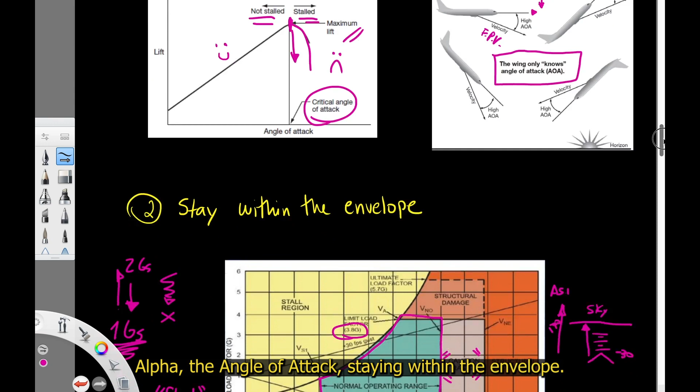So we've talked about the importance of alpha, understanding alpha, the angle of attack, stay within the envelope. The next thing we're going to talk about is you gotta stay in control.

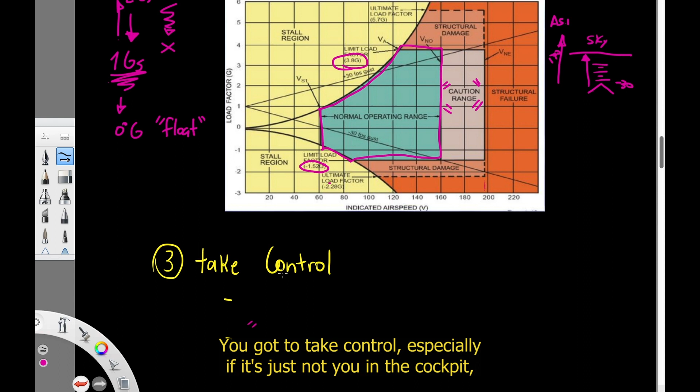You gotta take control, especially if it's not just you in the cockpit. If you're the captain, or even if you're the first officer, in a multi-crew environment, the airplane needs someone to take control, and only one person can take control.

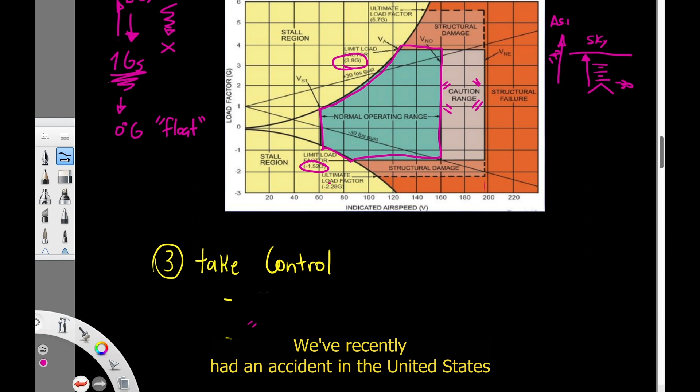We've recently had an accident in the United States where two different control inputs were applied. It sheared the control column and caused an airplane to crash. It's very, very important to understand who has taken the flight controls. That's why the positive exchange of flight controls is very important, and only one person flies the airplane at all times.

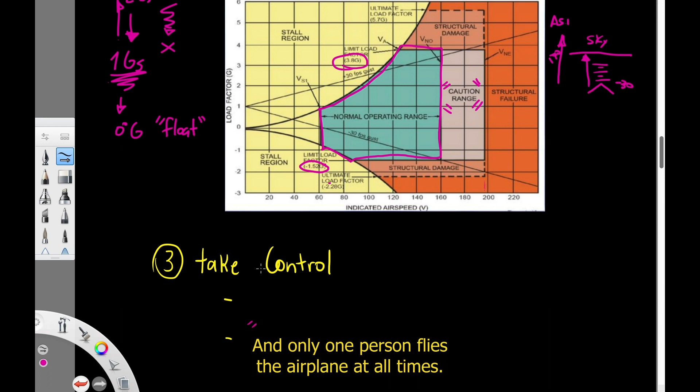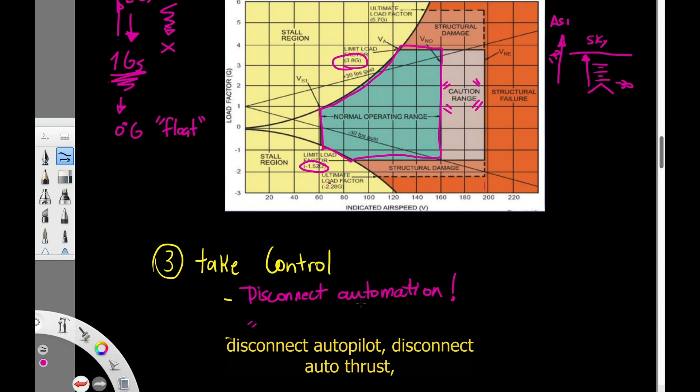So, take control. If you're flying more advanced airplanes with autopilot and auto thrust, disconnect automation. This is obviously if you are in an unusual attitude environment. Disconnect automation, exclamation point, period, done. Disconnect autopilot, disconnect auto thrust, and the next thing that should come out of your mouth is 'I have control.'

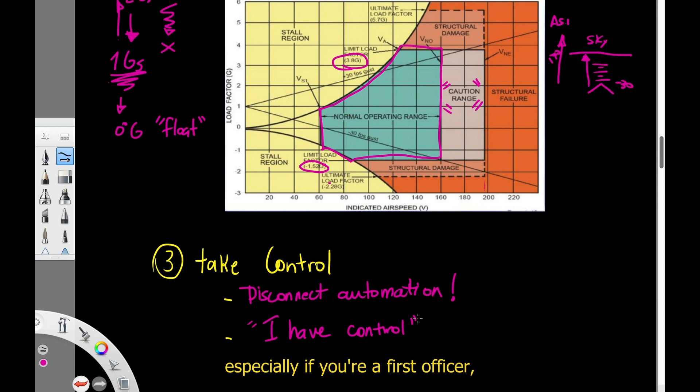But you might say, well, hold on, I was flying the airplane to begin with. Why do I always have to say I have control? Well, if you're in a multi-crew environment, especially as first officer, if you don't say 'I have flight controls' or 'I have control,' it's very likely the captain will take control immediately because that's his airplane.

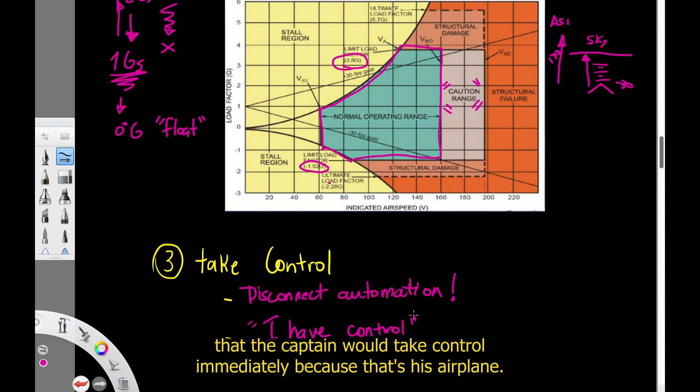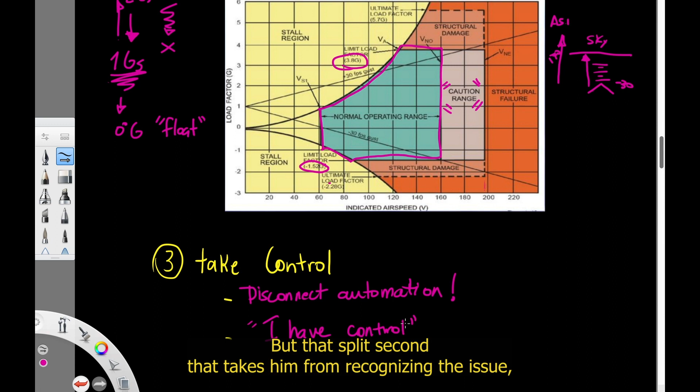It's a very common thing, they want to deal with it and take care of it. But that split second it takes him to recognize the issue, thinking 'why hasn't my first officer taken control? Oh, I have to take the flight controls' - that split second may well bring an airplane from an okay attitude that you can recover, to an unrecoverable unusual attitude.

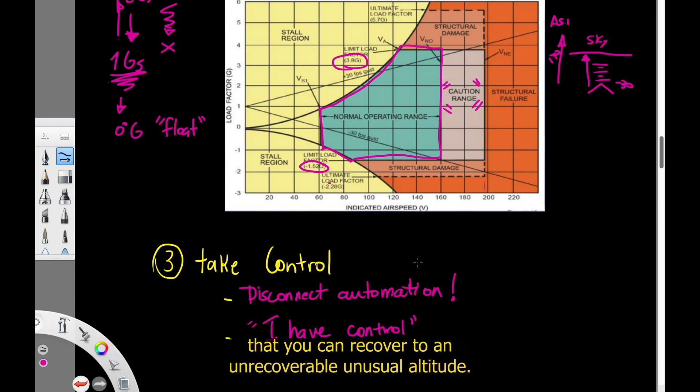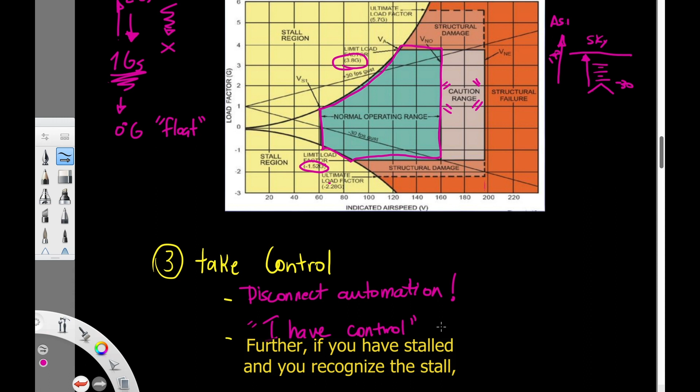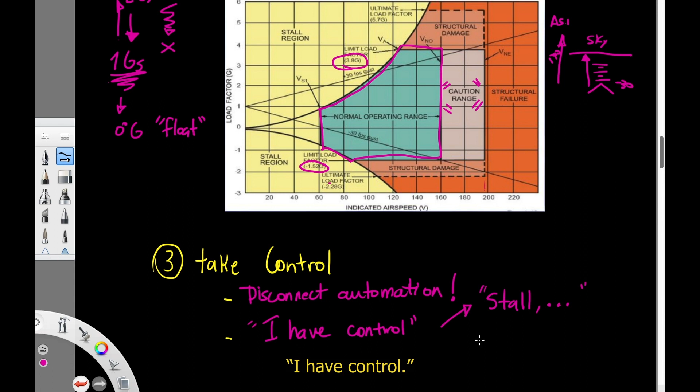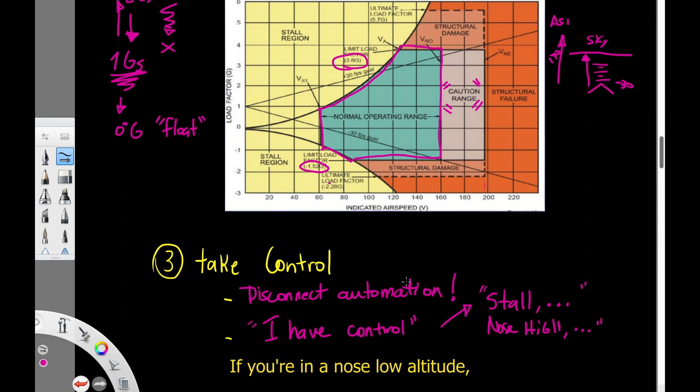So disconnect automation, verbalize very loud and clear 'I have control,' and then proceed with the recovery. Further, if you've stalled and recognize the stall, I would add the words 'stall, I have control.' If you're in a nose high attitude, I'd say 'nose high, I have control.' If you're in a nose low attitude, 'nose low, I have control.' You get my drift - very, very important.

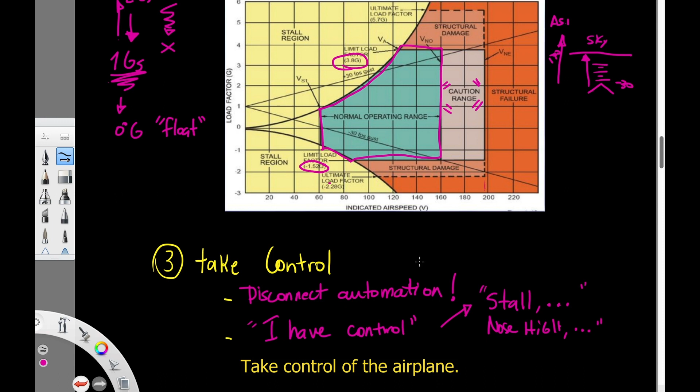Disconnect automation. Verbalize who has the flight controls. Take control of the airplane. Aviate, navigate, communicate. Now, we are in the fun stuff.

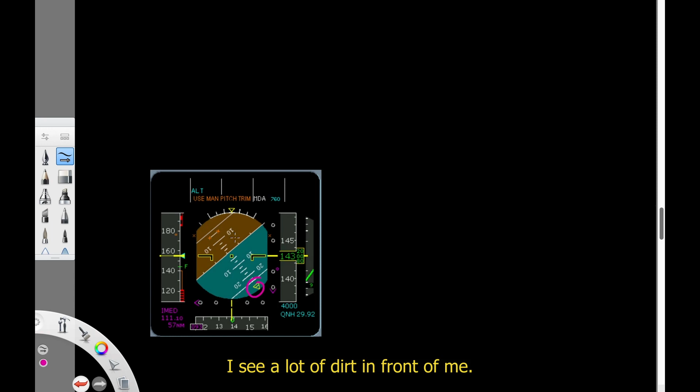So, we are inverted. How do we know we're inverted? Well, the sky pointer is all the way over here, pointing towards the sky. The pitch is right here. I see a lot of dirt in front of me. The sky is behind me because that's where the pointer is. And the horizon is right here.

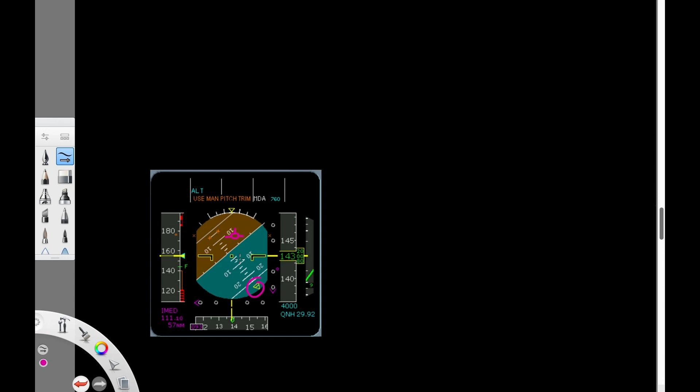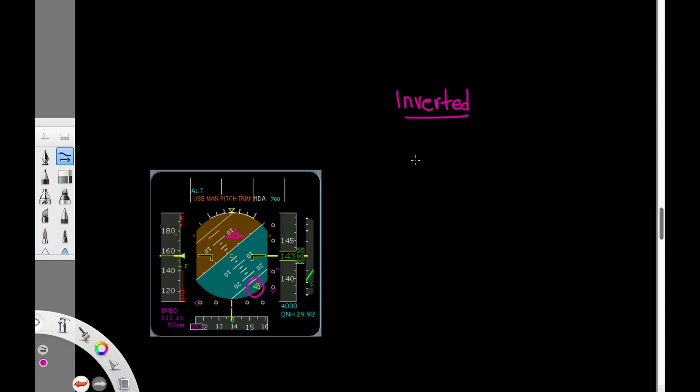Even though I'm a little bit above the horizon, my trend is actually - if I had a flight path vector - it would probably be somewhere down here, because that's where my airplane is actually going. So we've established we are in an inverted environment. We are inverted. So, what are we going to do if we are inverted?

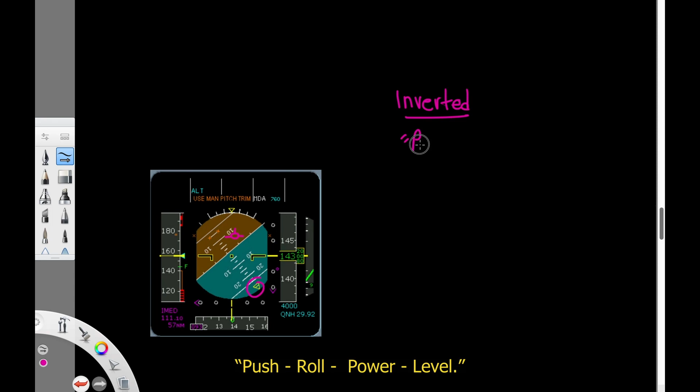I want you to think about this. Push, roll, power, level. This is really a technique in a nutshell. Push, roll, power, level. What do I mean by that?

Well, the first thing we've got to do is we have to unload the wing. We have to push forward.

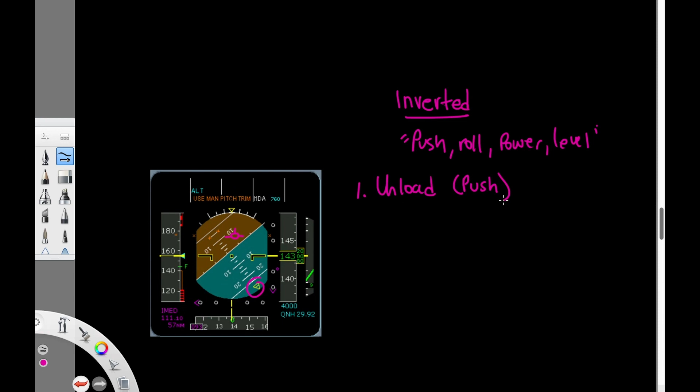Hold on, you're telling me that I am inverted, going down. This is where the path of the airplane is going - I'm going down, I'm going this way for sure. And you're telling me to push forward towards the sky?

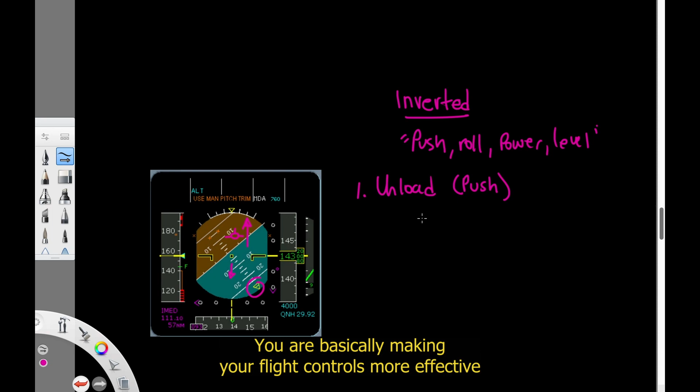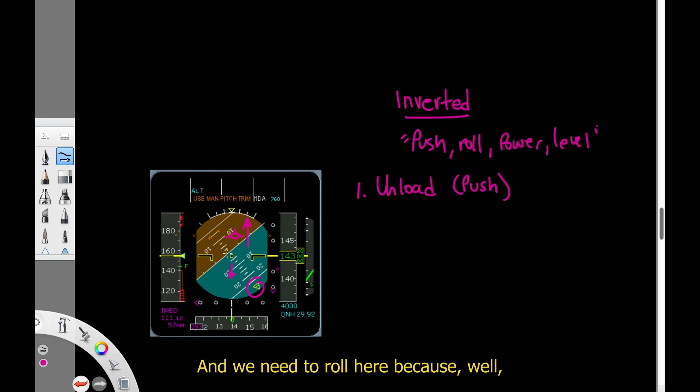Yes. Why? Because you're actually unloading the wing. When you unload the wing, you're basically making your flight controls more effective because it has less G's to fight against. So the ailerons are more effective, which means it can increase your roll rate. And we need to roll here because, well, we need to go back to our original attitude. So how do we unload?

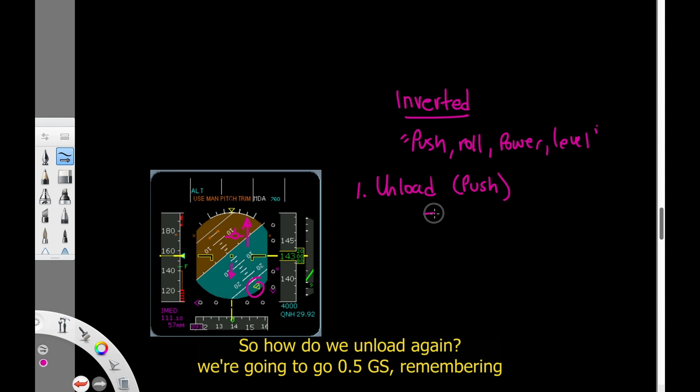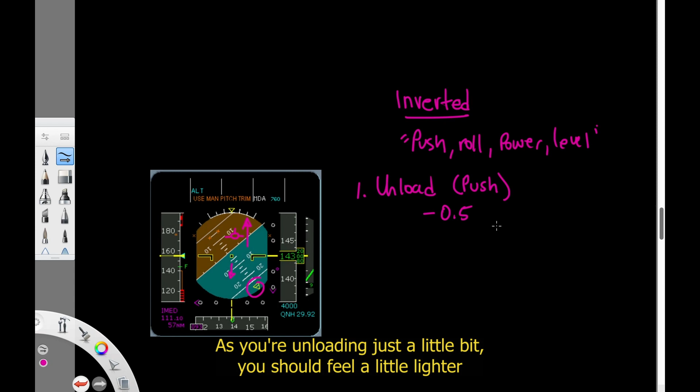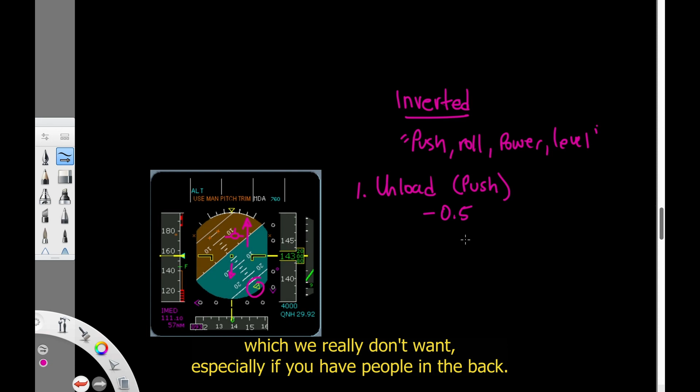Again, we're gonna go to 0.5 G's, remembering that when we are straight and level in normal flight, we are always at 1 G. 0.5 is you're unloading just a little bit. You should feel a little lighter as you do this. But if you float, you went too far and you're actually in a 0 G environment, which we really don't want.

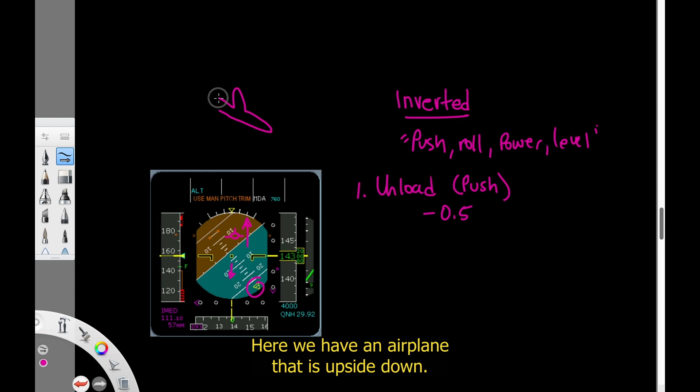Especially if we have people in the back. In any event, unload the wing, push forward, this way. Even if you push too much, the airplane is actually not gonna go up. Why? Well, imagine this: here we have an airplane that is upside down. When you push forward, what are you doing?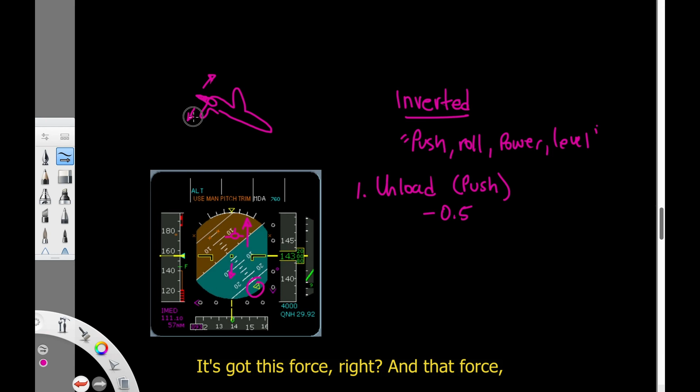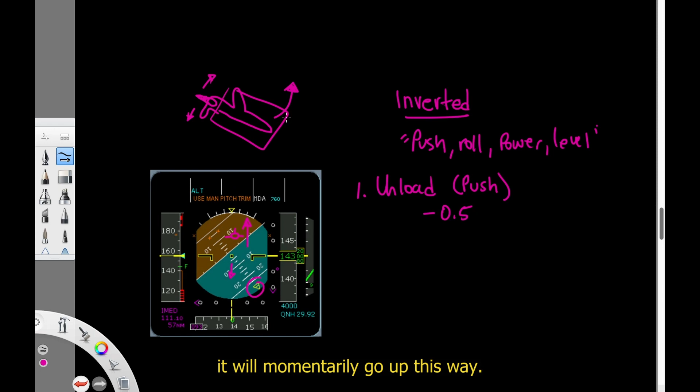Well, you have this thing here called the elevator. It's only this big, right? It's got this force, and the airplane is about this big and weighs a lot. If you push it forward to unload the wing, you're causing the nose of the airplane to go up this way. It will momentarily go up, but it won't go too much because the elevator just doesn't have the necessary force to actually fly inverted.

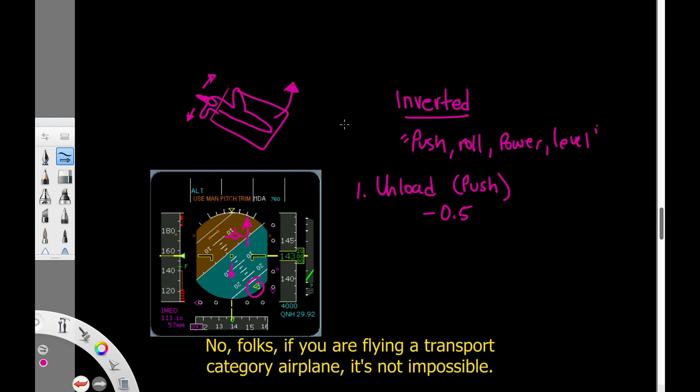No, folks, if you are flying a transport category airplane, it's not possible to fly inverted, contrary to what many believe, contrary to even what movies out there say. So the first thing is unload the wing, 0.5 G's. So you're going to push forward.

The second thing is we're going to roll the airplane in the shortest distance, very, very important, toward the sky pointer, or you can say towards where the horizon is. So I'm going to stop right here and I want you to tell me which way would be better, which one would be closer to the sky pointer: rolling this way or rolling this way. You guessed it right, rolling this way would actually be faster, because it has less distance to travel to go towards the horizon or the sky pointer.

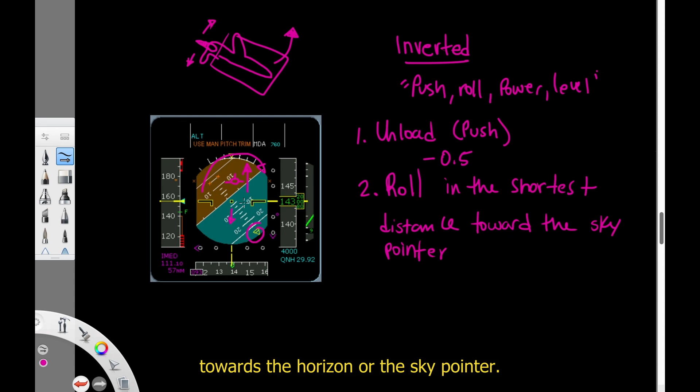How are we going to do that? We are going to use our ailerons. Remember, we've unloaded the wing, so the ailerons are more effective now. And we're gonna use rudder together, in other words coordinated. Just don't go full rudder, because now you can put yourself in a spin environment. Just ailerons and rudder together.

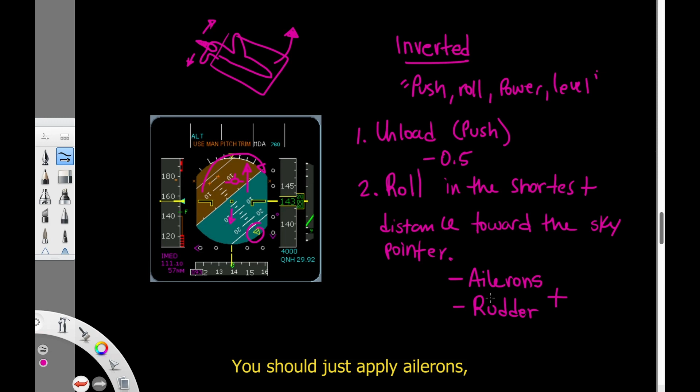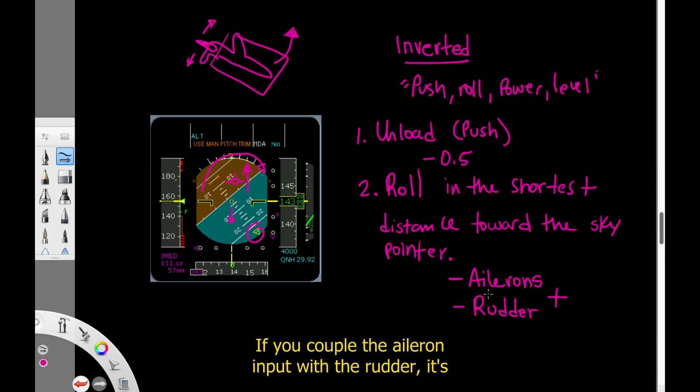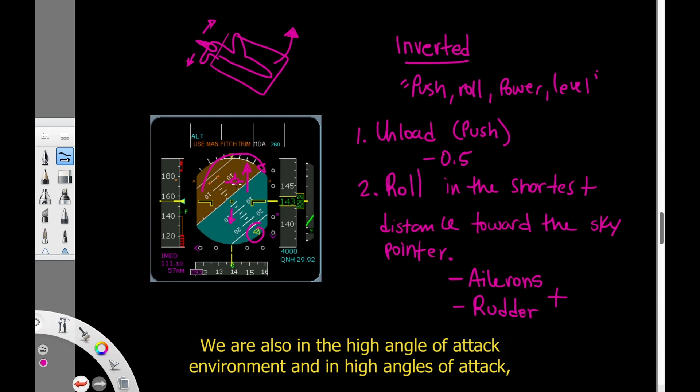If you just apply ailerons, even though they're more effective because you unloaded the wing, the airplane's gonna roll, but the roll's gonna be very, very slow. If you couple the aileron input with the rudder, it's gonna be much more effective. As we can see here, we are also in a high angle of attack environment. At a high angle of attack, we use a lot more rudder than aileron in order to bank and roll the airplane, so don't forget to use your rudder.

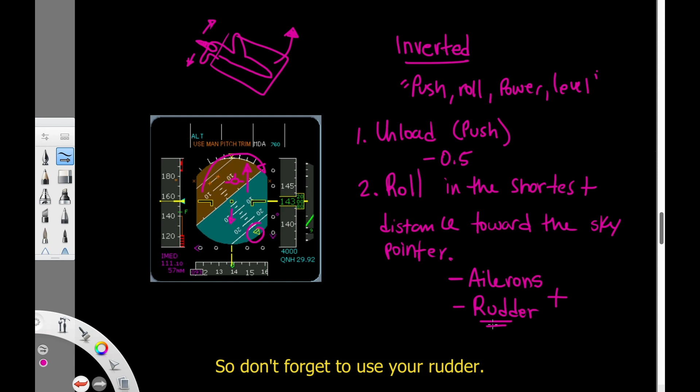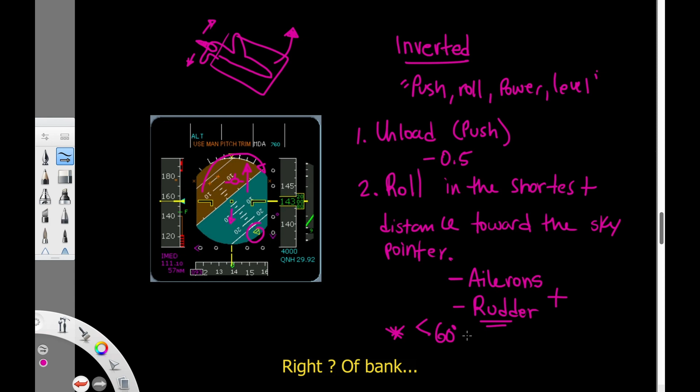And that's how we're gonna roll in the shortest distance. As you roll past 60 degrees of bank, this is when you're gonna start applying nose up or back pressure. The number 3

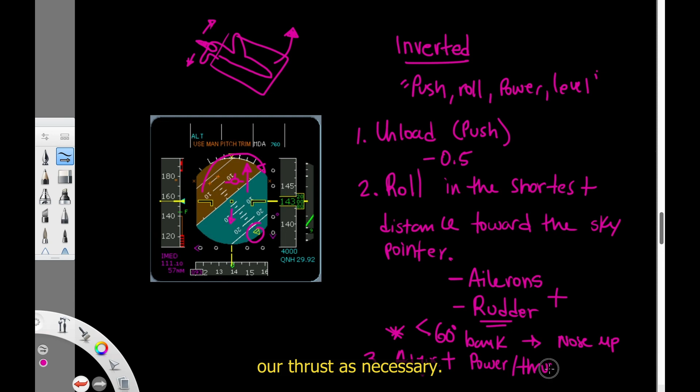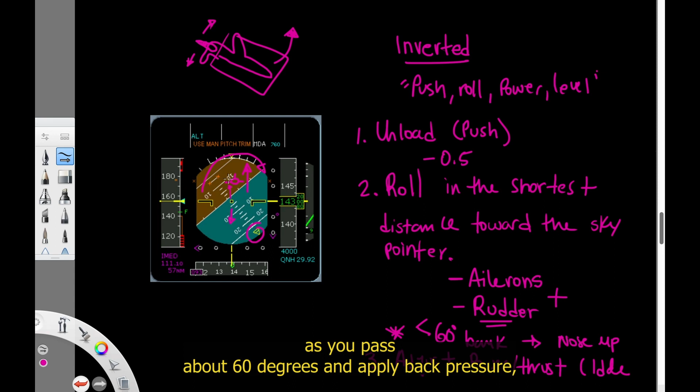now is when we adjust power, thrust as necessary. You're probably gonna go to idle here. Why do we say that? Because as you roll in the shortest distance, your flight path vector is still down. You're gonna see that your pitch attitude is gonna go down very quickly until you pass about 60 degrees. As you pass about 60 degrees and apply back pressure, this is when you're actually going to start climbing a little bit and your airspeed is going to start decreasing. But until then, your airspeed is gonna start increasing very quickly, so you probably want to go power to idle.

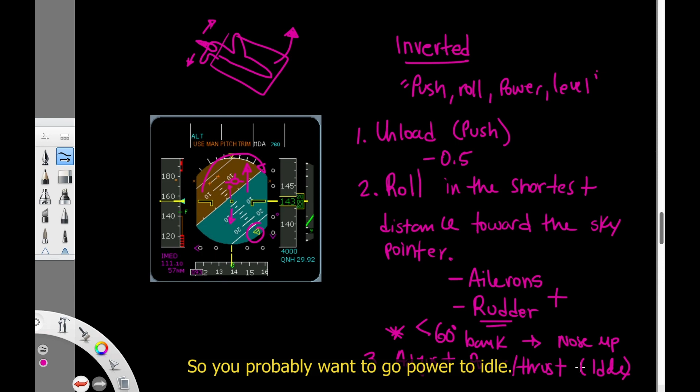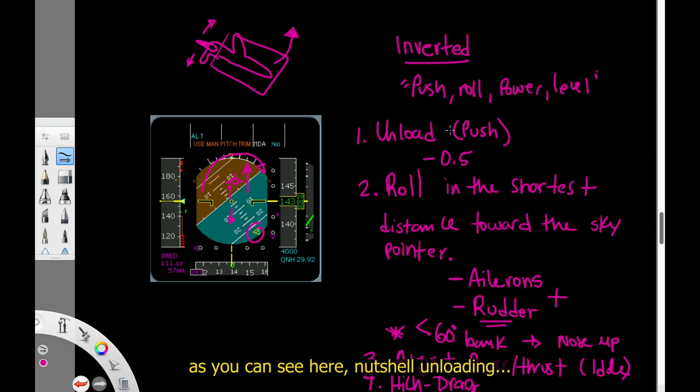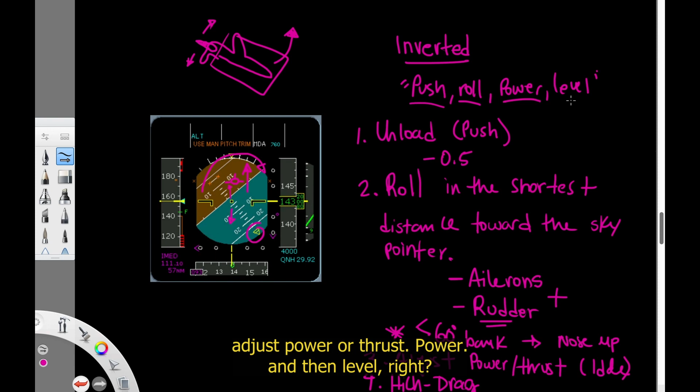And then number 4, high drag devices if you have it. As you can see here, in a nutshell: unload, we're going to push, we're going to roll in the shortest distance towards the sky pointer or towards the horizon, adjust power or thrust, and then level. And that's after, obviously, the high drag, you're going to level the wing. Okay, and then resume cruise flight.